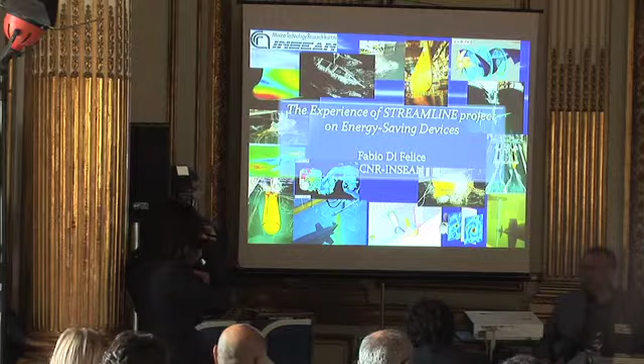So I'm providing here just a view that is completely different from the previous speakers. So my view is a research point of view. And it's just 10, 15 years before solutions come into the market. So I'm going to present exactly what happened on this project. That is a STREAMLINE project.

It's a European project regarding the improvement of propulsion systems. And this project is over. It's over almost 2 years ago. And it is a project where we develop some, let me say, new devices to be used for retrofitting ships, comparing to the design capabilities of the actual state-of-the-art technologies.

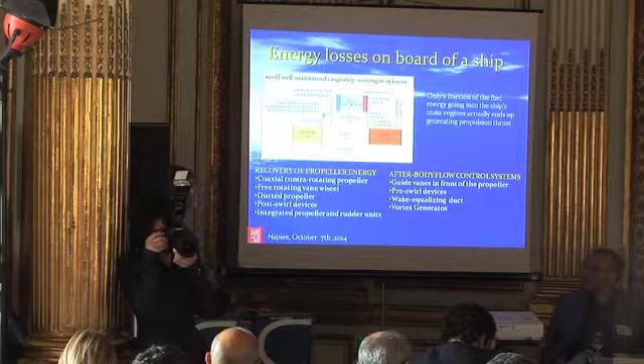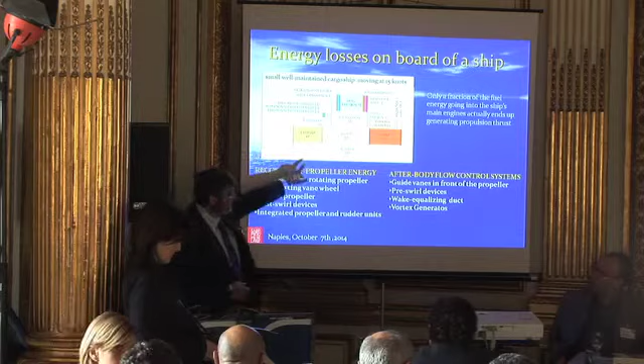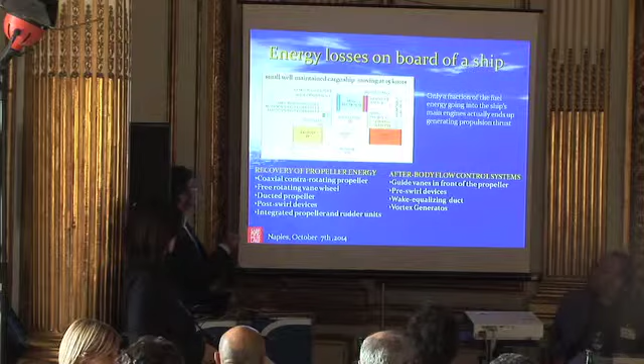So let me start from this diagram. I don't want to make a very technical presentation, but this figure is coming from IMO report 2009. For me, it's giving a lot of information for people that manage energy on board of a ship. So you could see that this table is the bunker energy going into the ship, 100%. Where is the energy going? This is a case for a cargo ship, so it's typical for shipping aspects. Of course, changing type of ship, this breakdown of energy will change.

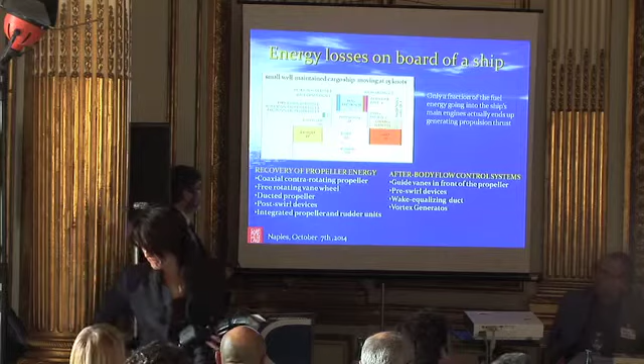But for these ships, most of the energy from the bunkers, so the money that you spend for the ship, is going to the shaft. Then there's a breakdown to propulsion that is needed for hull friction. This is 60%, air resistance, and wave-making resistance, and again, weather and waves. Some energy is lost in the propellers, but you could see here where the future has to go for energy management on board of a ship.

So we are losing 27% of energy in the exhaust, and we are dropping 30% in cooling. Actually we are working in this area. My work normally is working on the propulsion. But if you gain half of this energy, and we are able to re-put it inside the ships, this will give us big advantages. And this will be the future, how to use the energy from the exhaust. And there are solutions that are also already available in the market.

Actually, it's a problem that most of you have to face. My ship is mid-life. What can I do to improve? This is a question that I think is important, and to find an answer. So today, most of the energy is going to be recovered if you want to make, let me say, retrofitting of your ships.

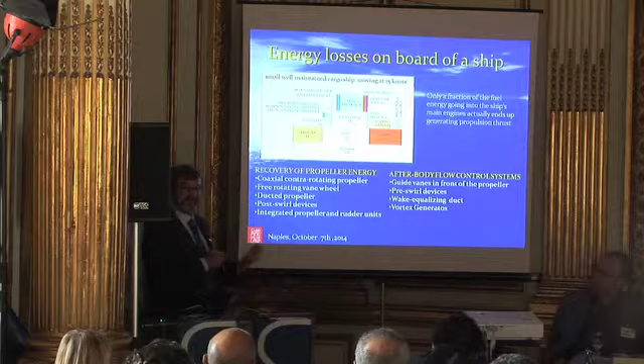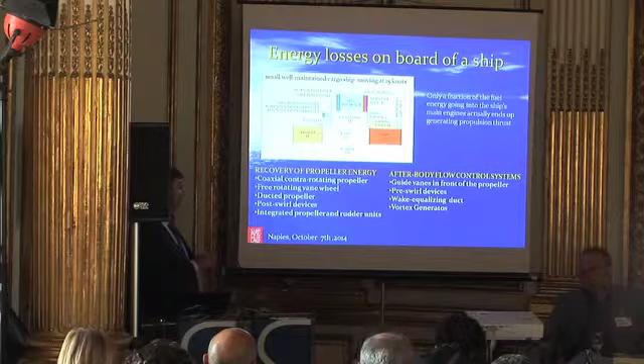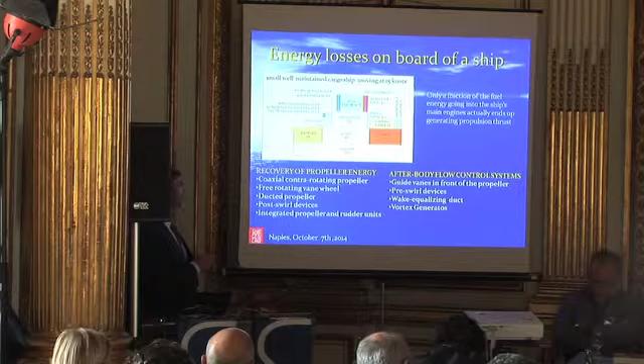Of course, let me say that hull friction is a very large one. So we saw before that some solutions about smoothing and surface treatment will be very effective because the fraction of energy that is lost there is very important. But on the other side, the propulsion system has to face an optimization because we can change a little bit such losses. So what I'm going to talk to you about is recovering energy from the propeller, or changing the inflow into the propeller trying to recover the energy.

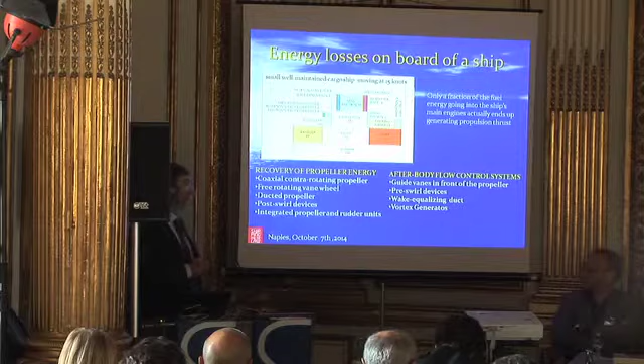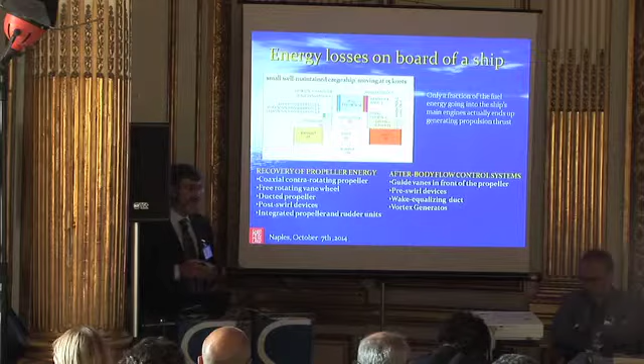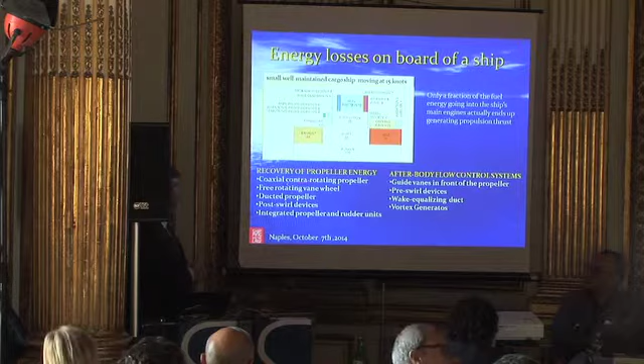And there are two types of, let me say, devices available today on the market. Some of them are just going on the market. We saw before Becker Marine, but there are other solutions from Rolls-Royce, I suppose also from Wärtsilä. So for recovering energy from the propeller, there are coaxial contra-rotating propellers, free rotating vane wheels, post-swirl devices.

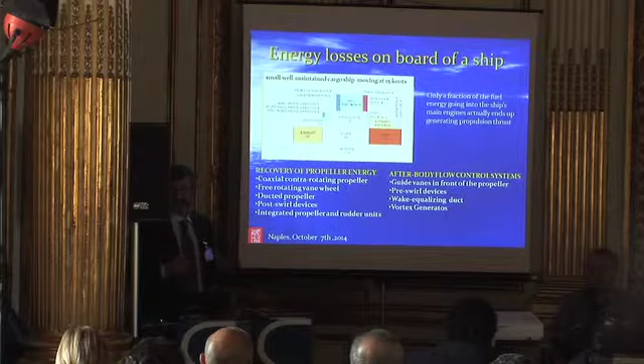All these names change depending on the providers, but more or less behind such names there is always the same idea. Others are working on the flow to the propeller, so changing the wake of the ship, trying to improve the propellers: guide vanes, pre-swirl devices, wake equalizing ducts, vortex generators.

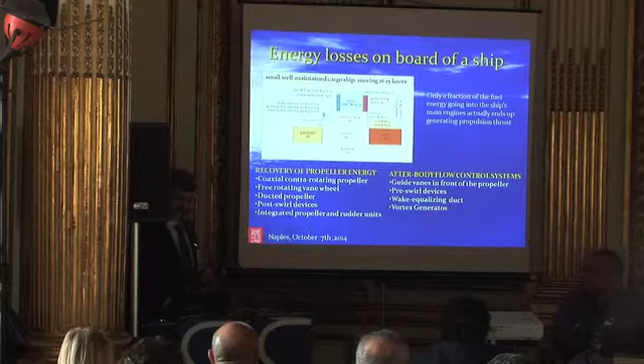I think that today this is technology that is available on the market, but what I will try to show you is that it is very difficult for you to have a solution, this solution, let me say. You can find your solution, but it will not be the solution usable for everybody.

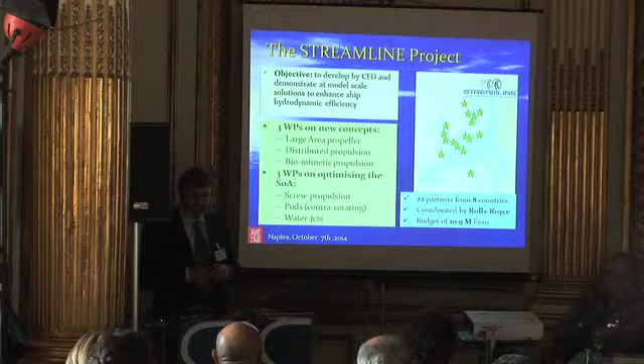So the results I'm going to present are from the Streamline project, a very large project of 11 million euros that has been funded in the 7th Framework, 22 partners around the world. It was coordinated by Rolls-Royce. And most of the research institutions were involved, from MARIN, INSEAN, SSPA, HSVA.

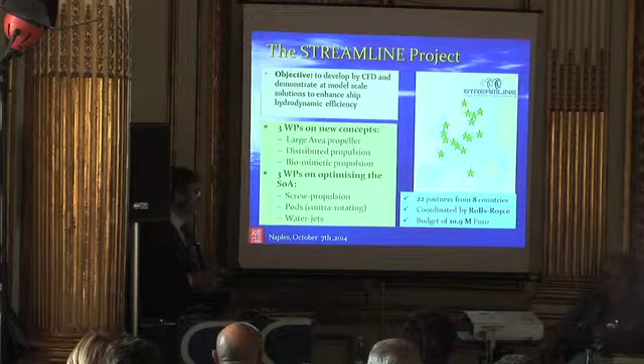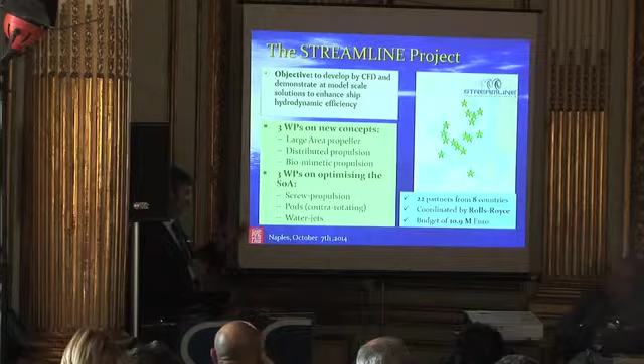And so we split the work between all these institutions, trying to make three types of work. First, to explore new concepts: the large area propeller, distributed propulsion, biomimetic propulsion. I think that you told me that there's a solution about a large area propeller. These are new concepts that require a new concept of ship.

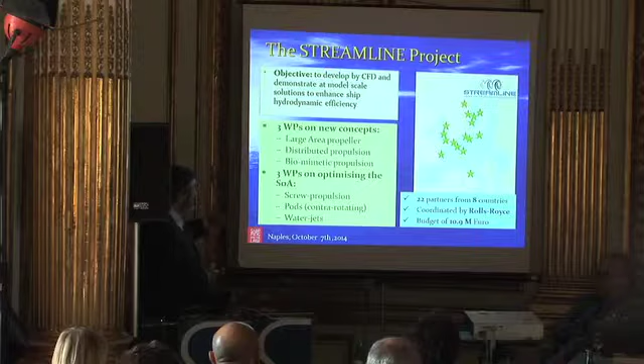And of course, if you are looking to a new ship, this solution will be, let me say, state of the art. And of course, there is some risk if you will be the first one to get such a solution. I think you have to be sure that you have some guarantees getting this solution. But of course, from a research point of view, I'm trusting this one.

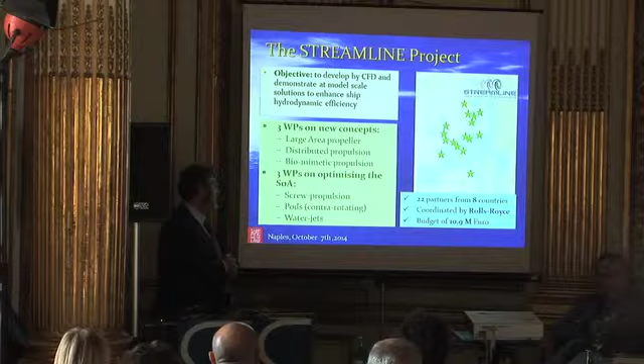The other one is to try to optimize the actual, let me say, state of the art propeller. For example, the screw propulsion, pods and water jet. All this work has been distributed among all the partners. So, of course, from your point of view, I think that's more interesting, this type of ship that was the test case for shipping.

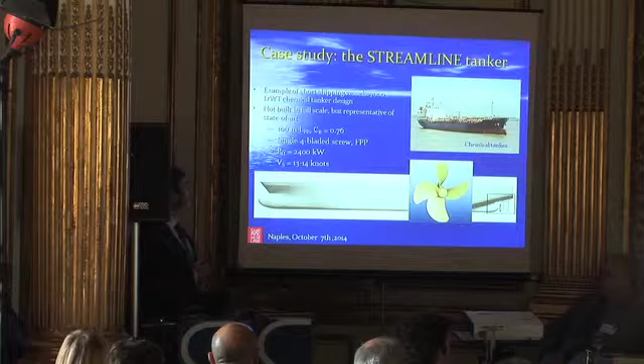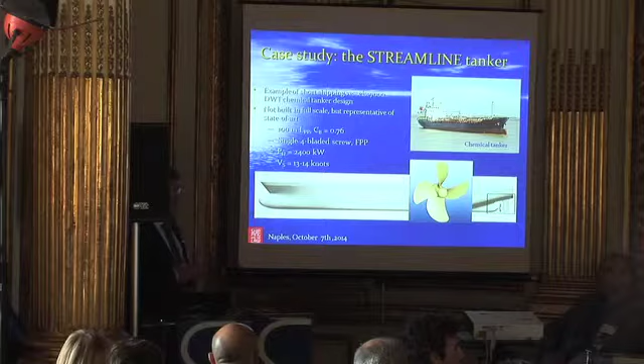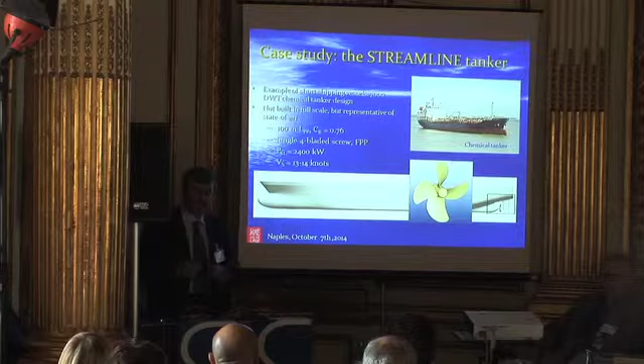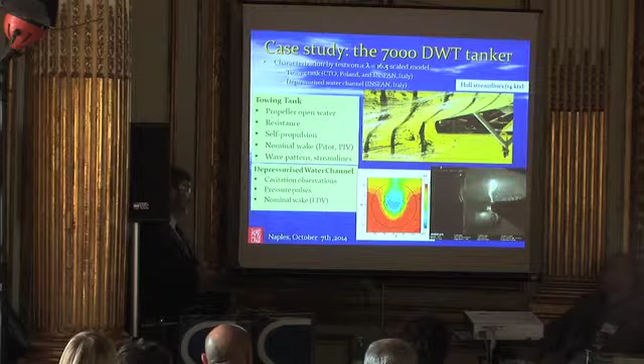The test case for the project was this 7,000 tons chemical tanker, it's a small ship, it's 100 meters. But this is a typical ship that is representing most of short sea shipping. And you could see the speed of operation is 13, 14 knots. The ship has been taken as a test case to study different solutions to try to improve the propulsion system. And of course, the work has been done from both sides, from the experimental point of view and from the theoretical modeling point of view.

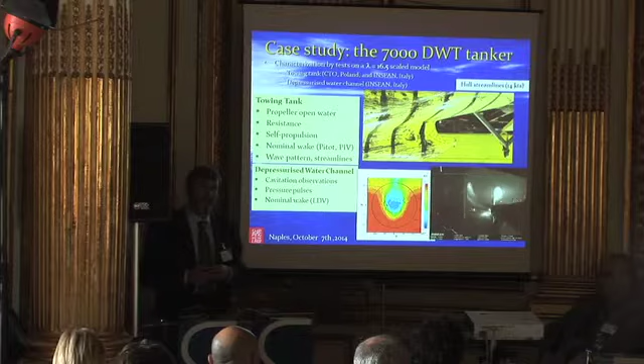Let me say that we talked before about greening, looking to the CO2 emission, but nobody said that there is another requirement that is going to come, providing new regulation: noise emission in water. Actually, in the next, I don't know, because I'm not an expert in regulation, maybe Lloyds can give us numbers. The goal is to drop the acoustic emission in water by 10 decibels, which is a number which is huge, it's immense from this point of view.

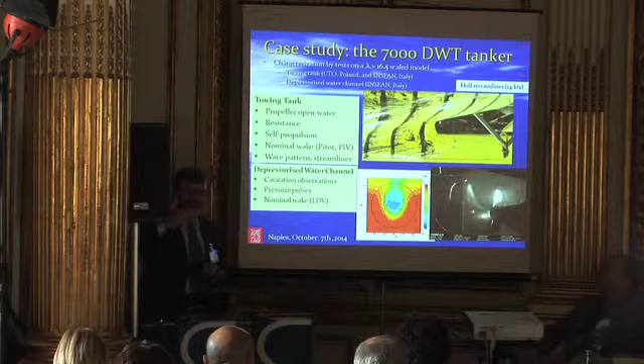And this will be more difficult to achieve than CO2 emission because it requires cavitation-free propellers, which means a completely new design for a ship. And when this regulation arrives, I think that we'll approach this problem, let me say, step by step. I don't think that will be a big step, but I think that we should come to this point.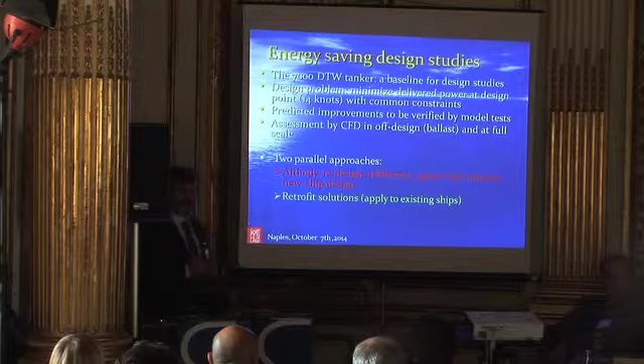So, looking to this test case, there were two parallel approaches. One was what we can achieve today. We start to design a new ship with the requirements and what we can achieve. And of course, I will not give you any information. Let me say that if today we design a new ship with the engineering tools available today, state of the art, we can design a ship that is 8–9% more efficient than a ship of 10 years ago. But this, of course, is something that can be applied today for a new ship.

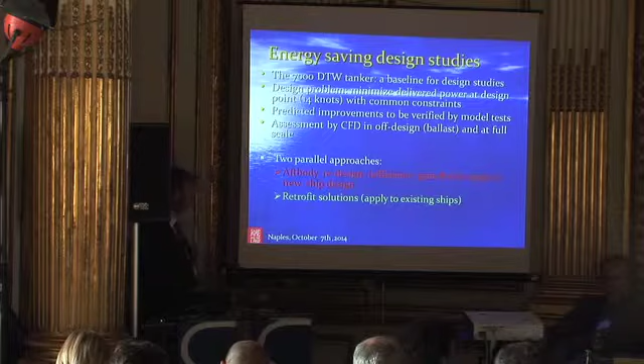But if you have a ship that is 10–15 years old, at midlife, and you want to make some retrofitting, there are other solutions, and this is what I'm going to present to you very quickly. So there are many solutions. I think that I saw tens of them. But what I can tell you is that in the project mainly this type of solution has been tested. You could see that it's very simple.

You can apply such types of appendages, and these appendages can modify the inflow of the propellers. Changing the inflow of the propeller gives a new working condition, and this can provide less torque, a different revolution rate, requiring different powers.

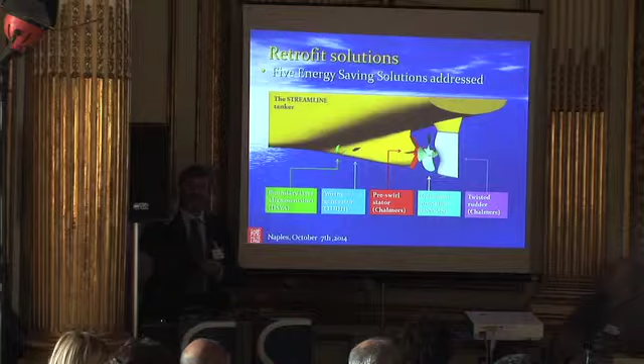Of course, most of them are, let me say, very simple. This is a boundary layer alignment duct, vortex generator. This is pre-swirl stator. This is an optimized propeller, and this is a twisted rudder. And of course, you could see that it's not a solution. No, I mean, it depends on your designer, who is the technician.

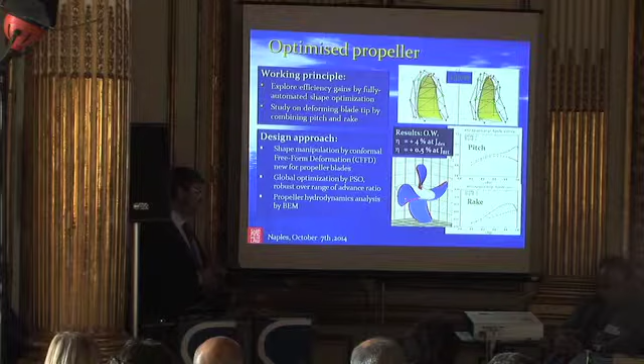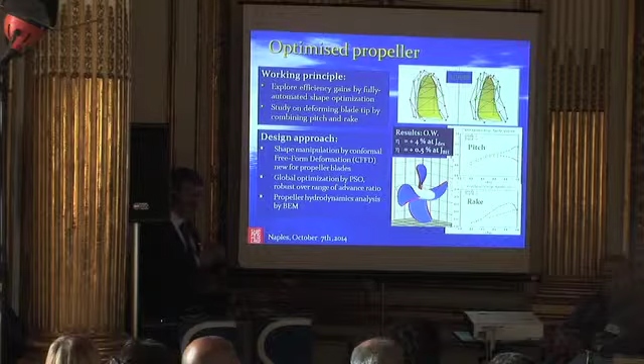And I think that it's important to understand that, for example, today there is a new technology for designing propellers. This, for example, is a propeller designed by my institution. We achieved a propeller with 4% better efficiency. So you can replace the blades of the actual ship, getting a new performance with the same diameter. I mean, we changed only the shape of the blades.

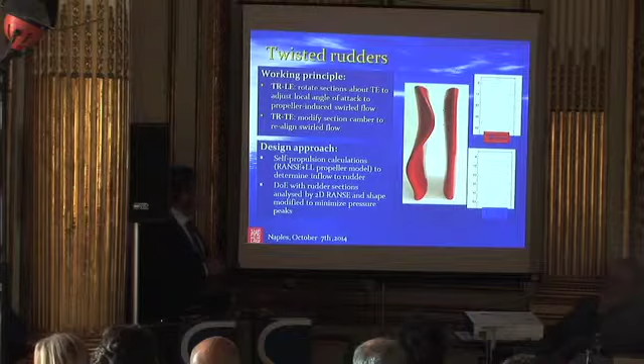Of course, the twisted rudder is more difficult to build, because I know that in construction you don't like to have very complicated shapes. But this one, we saw that it will be very effective because it is working in the wake of the propeller, where we lose a lot of energy in rotational motion. And this motion is recovered by the shape of the rudder. And of course, this is a solution that can be easily applied also in the mid-life of the ship.

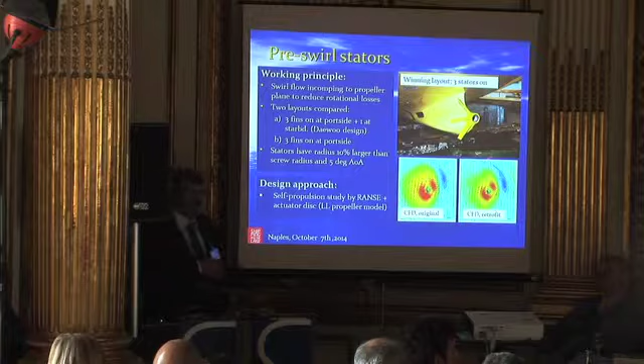This is a pre-swirl. It's more complicated, but it's working on the same principle. So before the propeller, we twist the flow. We put the flow in rotation. This is changing the inflow of the propeller and changing the efficiency at the propulsion point of the propeller. This is more difficult to apply because it requires the dismounting of the propeller.

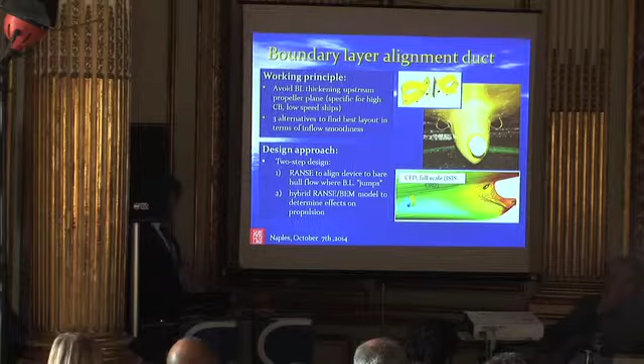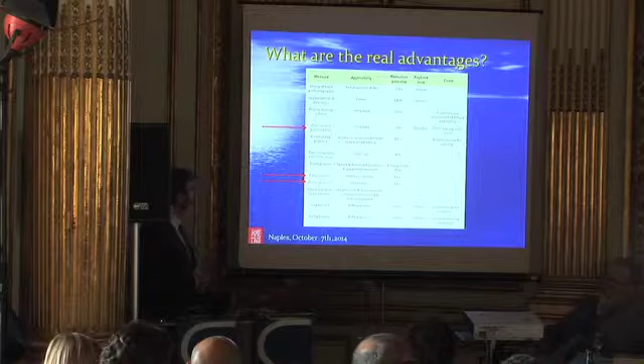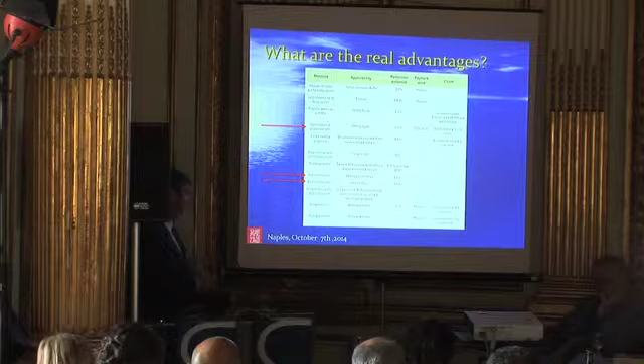And of course, this one is the boundary layer alignment duct. This is very simple to adopt. At the end, this is a vortex generator. Let me say that actually this is a figure that I got from IMO. It's a table that most of you could have a look at. I'm sorry, I don't know if you are able to see this, but you see that for the case that we analyzed, we get, let me say, a potential reduction of fuel consumption of the order of 2% for optimized propellers. That's what we got also in the project.

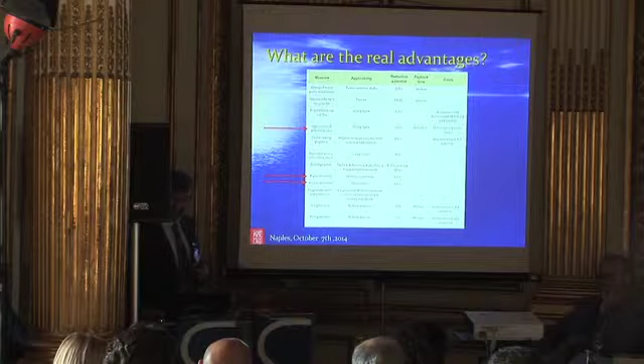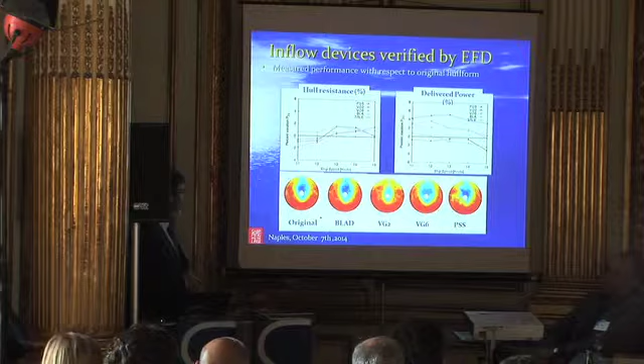Pre-swirl device between 1 and 9%. Post-swirl device 1 to 9%. Let me say that from a technical point of view, this is quite difficult to achieve because, for example, for the case of the tanker that we had as our test case, you could see the main effect of this device is to change the inflow. This is the inflow of the propeller. This is changed dramatically. And most of these solutions are increasing the power. So it's not easy to say; most of us failed in trying to make an optimization using these devices.

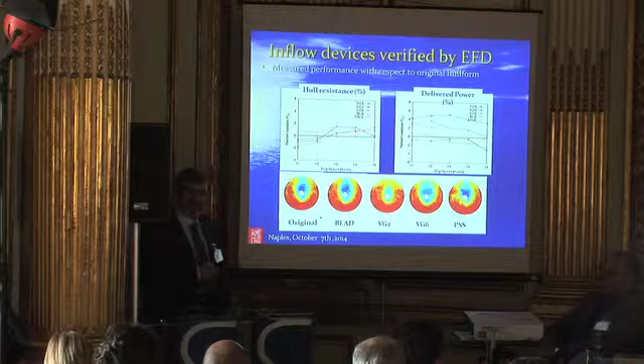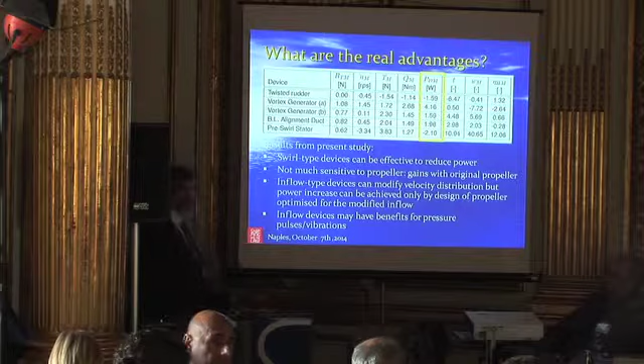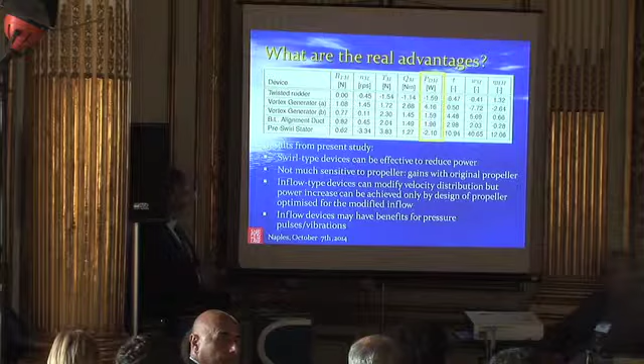Really the advantage was in the twisted rudder and pre-swirl stators. So at the end, you could see this in this table. So there is a risk when you adopt such a solution that you hope to gain, but you lose. You see, for example, vortex generators that are very simple. If you don't take care in design, you can have an increase of consumption, not a decrease. While for the twisted rudder, and today also the pre-swirl stator, I'm quite sure this is a real gain. But these are the numbers, 1%, 2%, not 10%.

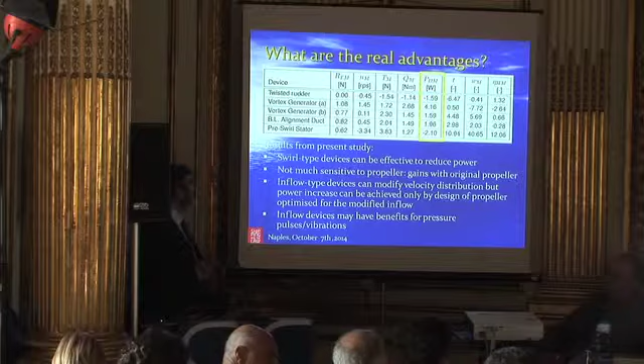I don't think that today it is possible because this is energy that we recover from the propeller. There is not so much energy lost in the propeller. So let me say that if you adopt one of these configurations, vortex generators or boundary layer alignment duct, you also have to redesign the propeller. You cannot use the previous propeller. This was the outcome of our projects.

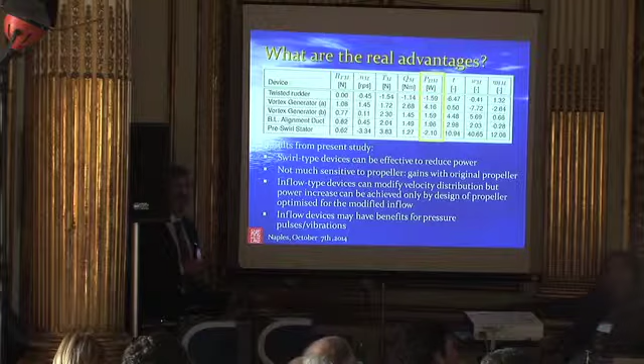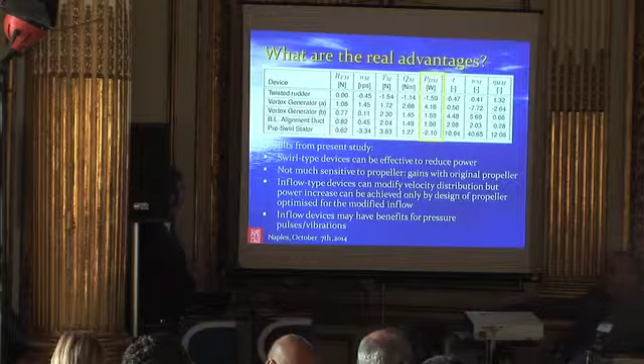And the other aspect I could say is that the most effective aspect of these devices is changing the noise of the propeller. So if you are looking to reduce the noise of your propulsion system, which is the main source of noise, you have to work on these devices looking at the reduction of acoustic emission.